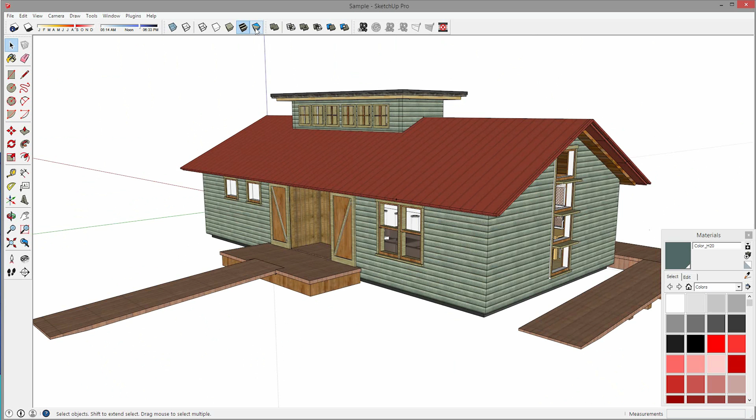Today I am walking through the process from SketchUp into Unity 3D, which will then build out to virtual reality. This rollout on the left will let you go to any place in the video you'd like. This is just a fast-forwarded walkthrough of what I'm doing to get these SketchUp files clean and ready for virtual reality.

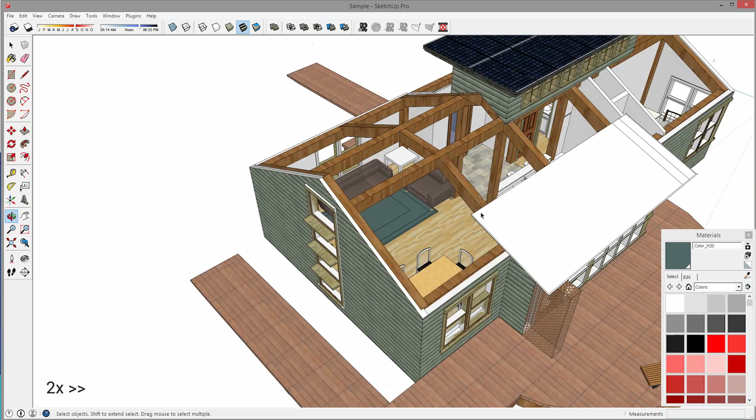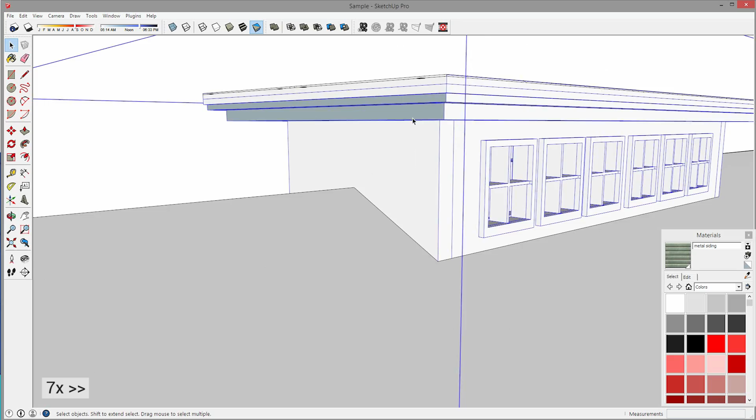So this is the SketchUp file. I start out by orienting all of the normals, and a lot of people don't know this is something SketchUp can do. I turned the edge style and face style to monochrome, which allows me to see which faces are actually flipped. When you import this into another program, these faces will be invisible, so you'll be wondering where that geometry went.

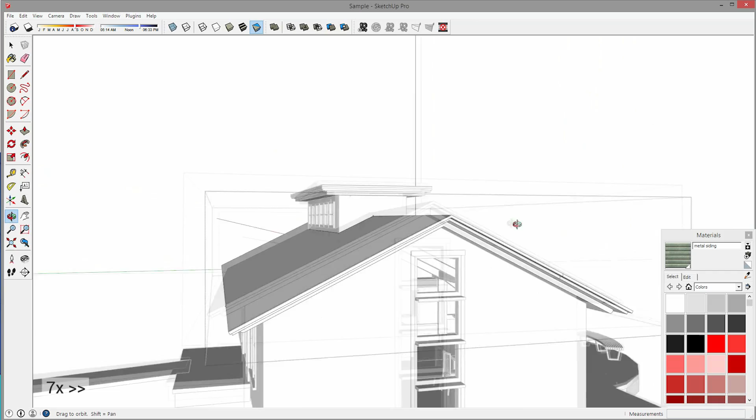So I turned on monochrome, and now I'm flying around the model figuring out which faces are inverted, and I'm flipping them while doing some general cleanup. This is an old file of a house I worked on about 6 years ago when I was learning SketchUp. I picked this because it's a particularly messy file, and it'll give you a good idea of the cleanup required for these SketchUp files.

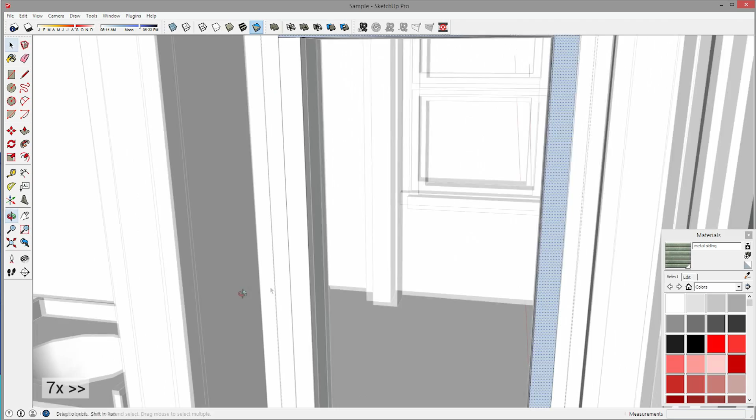I draw these section boxes and systematically go through and flip the normals of all these different items. To flip the normals, I'm just selecting the faces and right-clicking to do a reverse face, and once it shows white within monochrome, you know you've done it successfully.

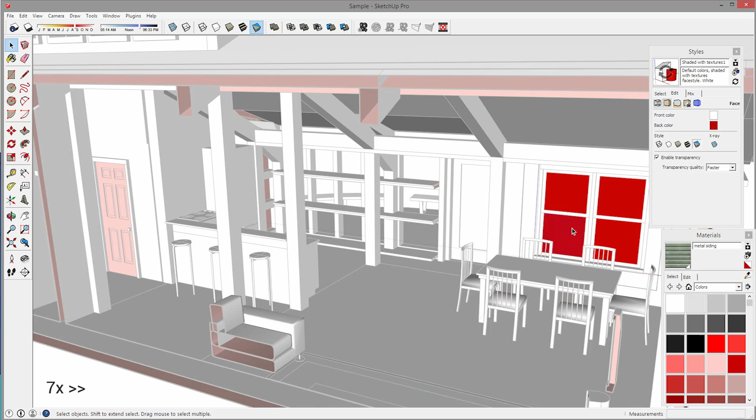What I just did was turn my face style to show all the back faces red, which is an easier way to see what's inverted and what's properly oriented. I highly recommend using the section boxes—it makes it quite easy to see what's going on.

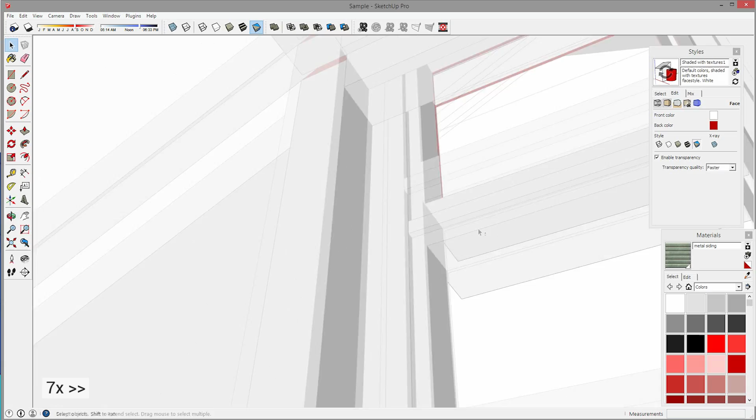All right, next I'm texturing these faces again. When you reverse faces, often the textures won't come through, so I'm just taking the paint bucket and retexturing all of these items.

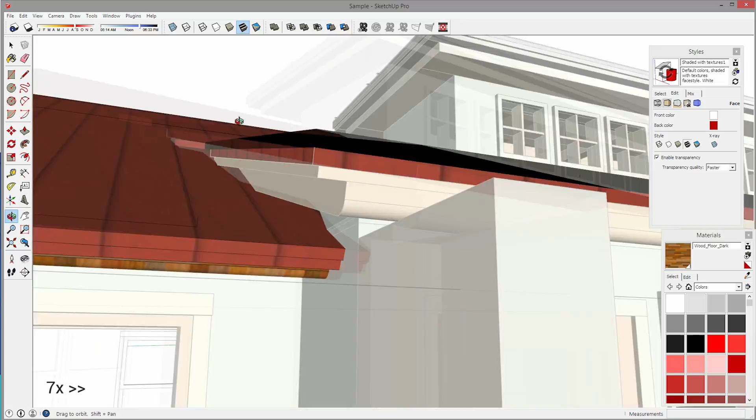I like to texture in SketchUp first because it'll translate into 3ds Max, and you'll be able to sort and select and organize by those materials. I do recommend keeping the materiality of your SketchUp model fairly organized, so you'll be able to use that organization later.

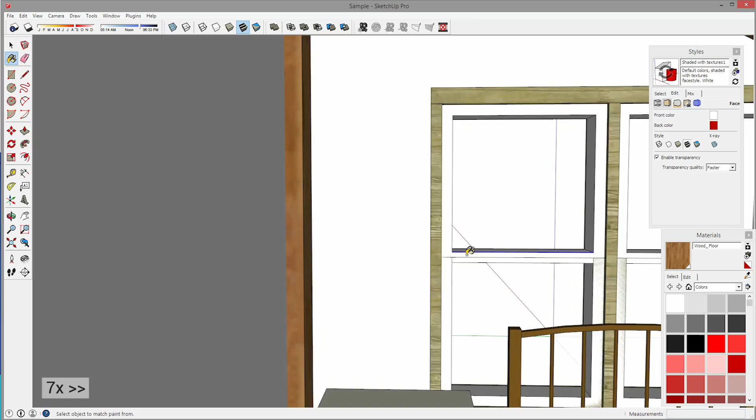I also wouldn't worry about total photorealism with these textures within SketchUp, because once we're in 3ds Max, I usually switch these out for higher resolution textures anyway.

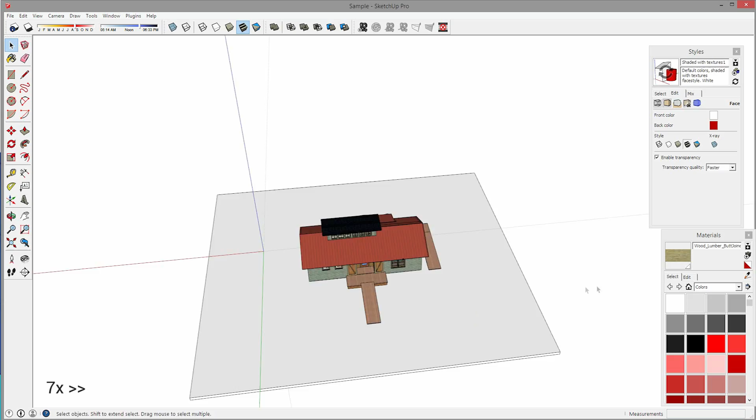I just made a ground plane, which is easier for walkthroughs once you're in virtual reality. It's nice not to fall off the map, and I recommend a general ground plane if you don't have that on your model already.

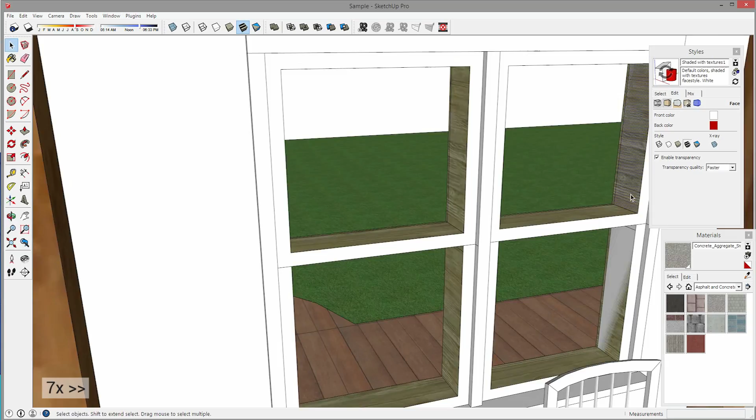You can see what I'm doing now is flying around looking for any sort of Z-fighting. That's where two faces overlap each other, and in SketchUp you get this flashing—you'll actually get that in Unity as well. It's very disorienting once you're in virtual reality to see this flashing.

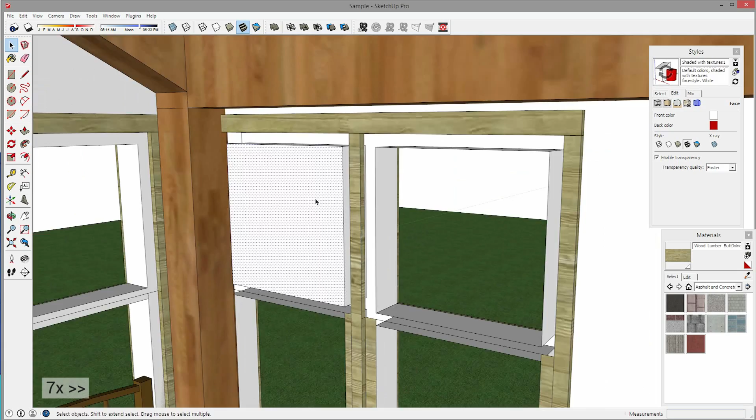Generally that's just from messy modeling, which in this file is a lot of the windows. So I'm going through and deleting the faces that are overlapping, then making one dominant. It was pretty tricky on some of this because I didn't do groups properly when I was learning, and a lot of the mesh is just overlapping on the same layer—it's generally a nightmare.

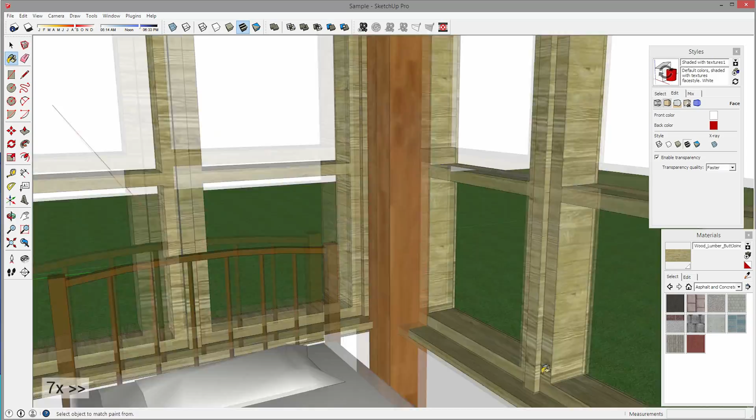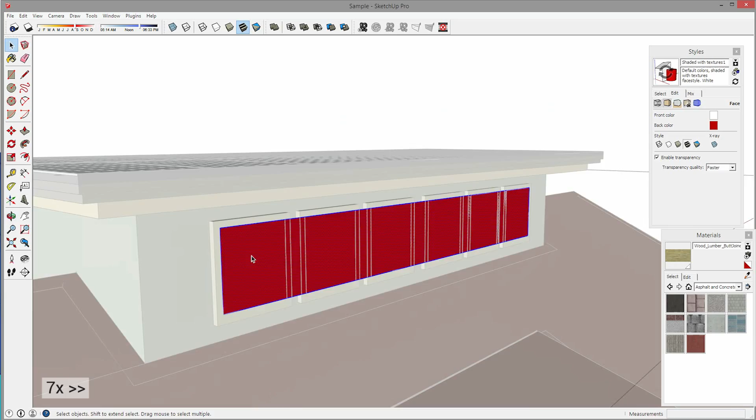Now I'm building a specific group just for all the glass. For occlusion culling and for general materials, I like to have all my glass on one layer or one object, especially going into Unity. So I'm creating all these glass planes individually under one group and giving them all the same material—it'll be easier later on to sort.

Honestly, if you're working with a big file, I wouldn't worry about this step, but this was a small house, so I could do this relatively quickly.

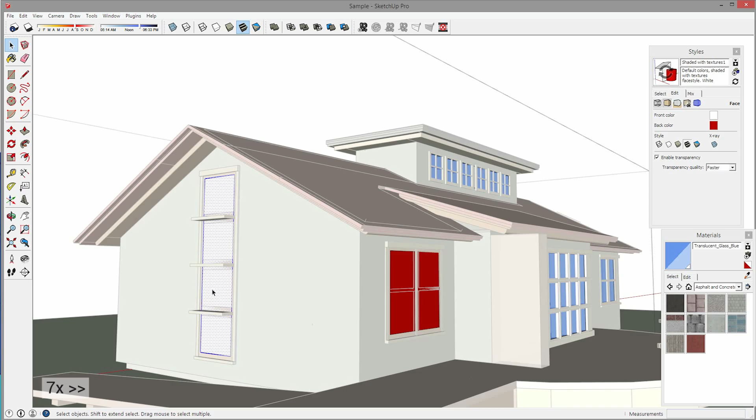I'm also making these rectangles three-dimensional, giving them a little bit of depth, which allows me to have true double-sided faces within Unity, so you can see the glass from both sides.

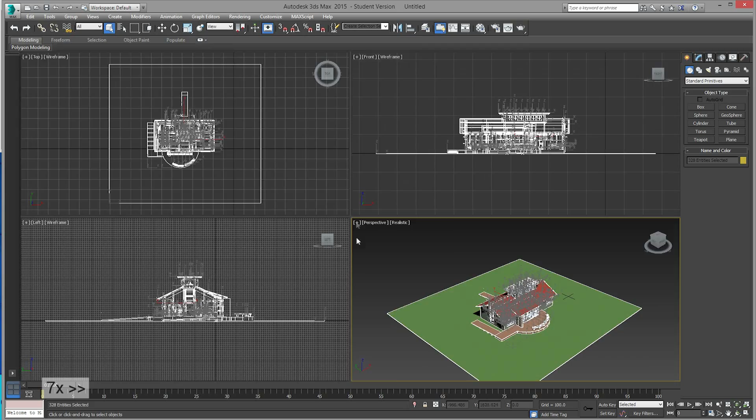I'm purging my file now, which I highly recommend doing—that will really limit file size when you export. Then I just back-saved into SketchUp 8, which allows you to import it into 3ds Max natively. If you have SketchUp 2013 or 2014 as the file, you'll get an error when you try to import into 3ds Max. So you want to back-save to 8 and then do the native import into 3ds Max.

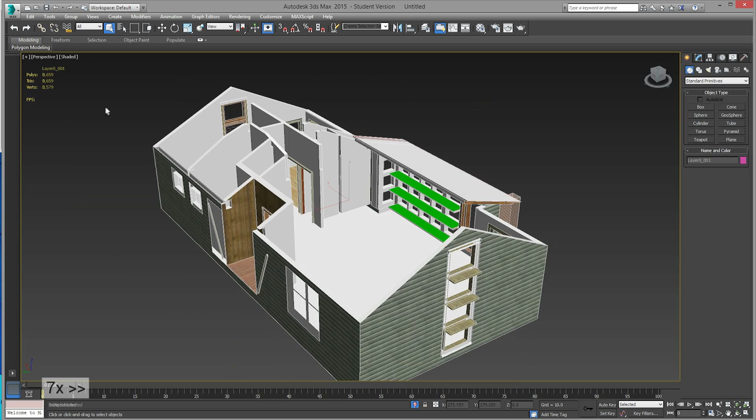I'm just checking the integrity of this file and making sure everything came through. You can see that I also turned on polygon count to see how heavy the file is.

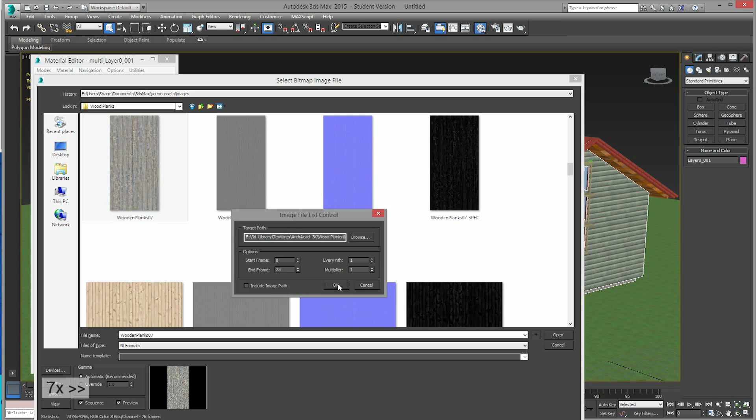Now is a very laborious process of going through and doing texturing within Max. This really comes down to how photorealistic you want your file to be for the VR walkthrough. But I have some huge library from Andrew Price of really nice, full high-res textures. In Max, I tend to go through most of the primary elements of the building and replace a lot of the SketchUp textures with these very realistic, high-resolution textures.

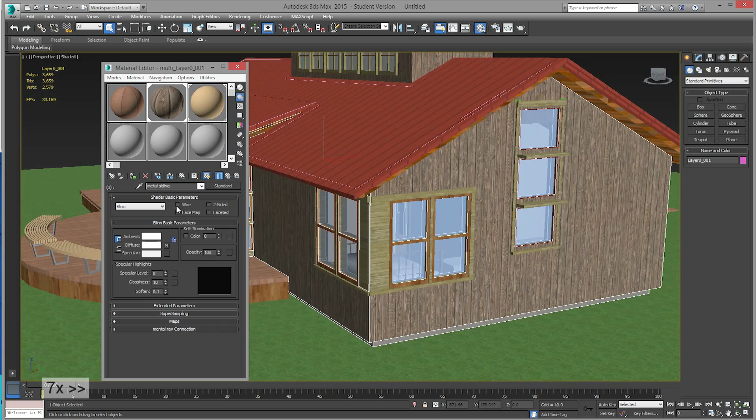What's nice about this package I got from Andrew Price is they come with normal maps and specular maps. You can see as I'm sorting through, I have a whole bunch of options with a lot of great maps. That was through the Architecture Academy, and I highly recommend checking out that entire suite.

This can really be as detailed or as long as you want. In general, I like the 3K textures because I can have them as high resolution as I want depending on the hardware for the final walkthrough.

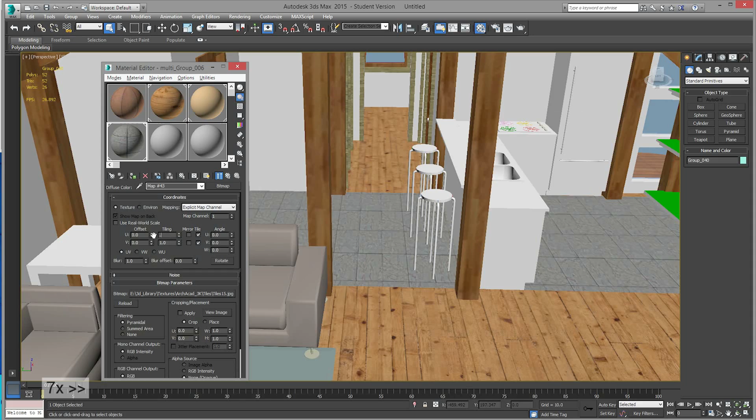I use Max instead of SketchUp because of its UV mapping, and when I want to get really detailed with any specific element, I can go in and actually tweak the UV maps and get them just the way I want before exporting. As I'm doing right here with the tiling, I want the seams to line up with the wood floor edges, so I do a bit of tweaking here to get those to orient nicely.

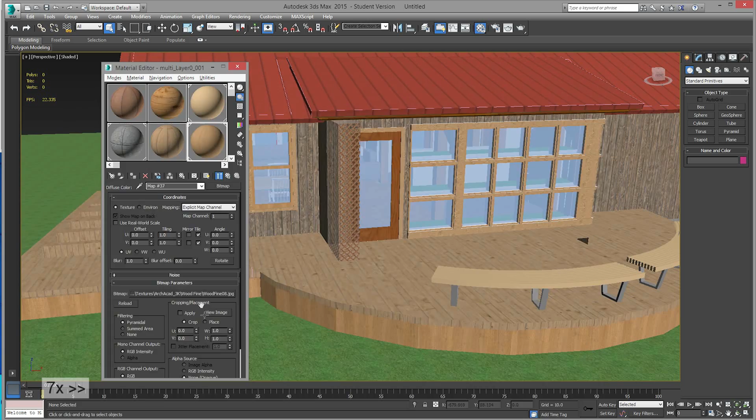Another note is SketchUp imports all of these materials as standard materials. If you're importing from another program like Revit, you might have Autodesk materials, and you're going to need to download a plugin or do it manually to get standard materials. That was my computer crashing and me booting up again.

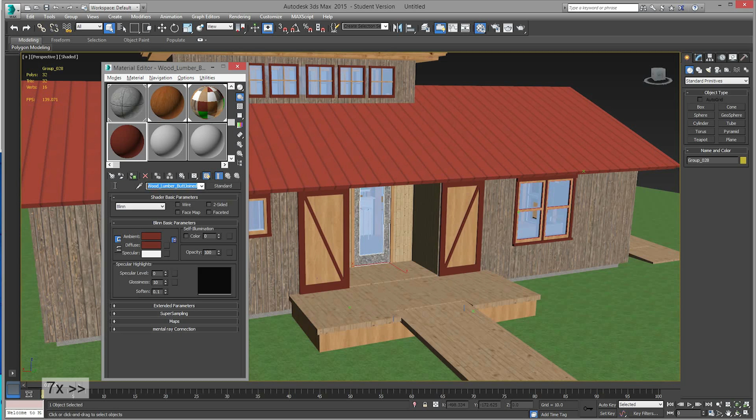What I'm about to do with some of these textures is, I didn't have all of the textures in-house on my machine, so I use CG Textures a lot to grab any other textures I might need. In a second here, you'll see me go there.

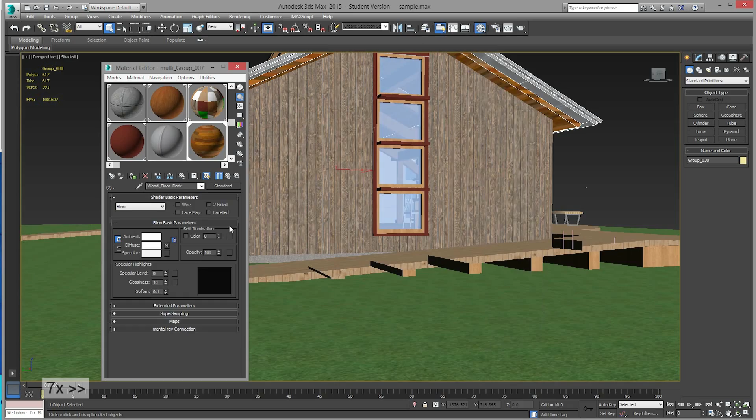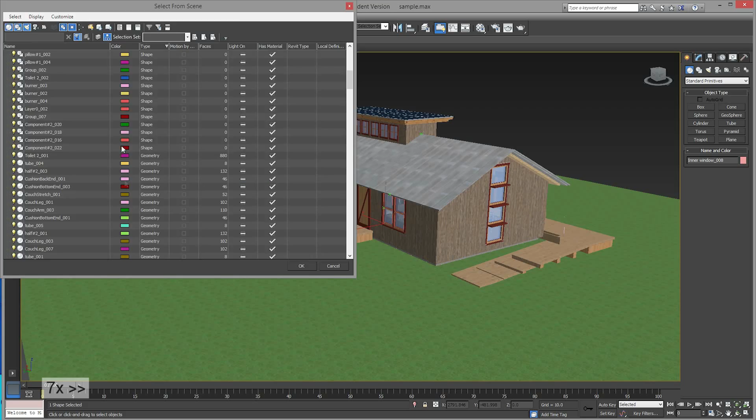Another reason I like to use Max is it'll get rid of any stray lines. You can see here I'm selecting just the shapes in the entire file and deleting them, and then that will get rid of any stray edges or points that aren't attached to faces, which just cleans it up a little bit better.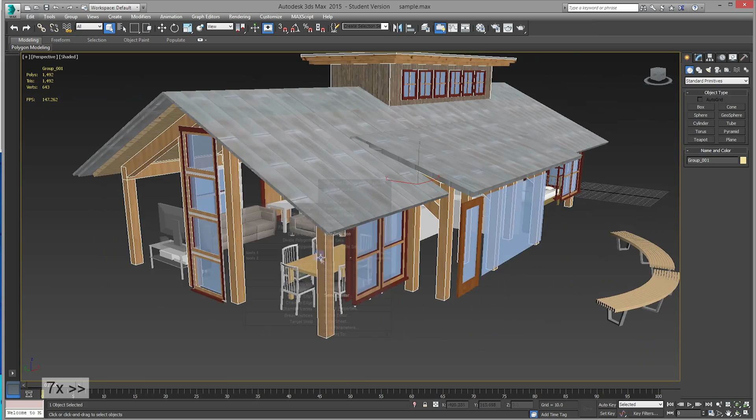Now what I'm doing is creating selection sets, and this is the best way to export your files. I recommend selecting various elements of the geometry by their properties, like walls, floors, windows, creating selection sets, and then exporting them as FBXs.

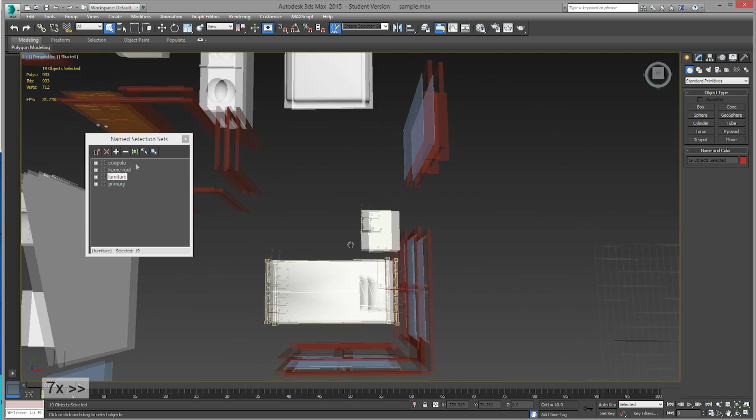If anyone's interested, I can upload my FBX settings, but really the only thing to note is that you want to export selected based on your selection sets, and then literally just hide them when you're done so that you keep your file organized. I also recommend embedding your textures and all of your media so that the FBX file is self-contained and has the textures inside of it that you need.

You can also see that as I go through this, I'm finding a couple of little things that I forgot and decide to tackle while I'm exporting this file. The reason I like using selection sets is that if you ever need to make an edit or there's something off, you can just toggle on that one selection set and edit whatever you need to in it.

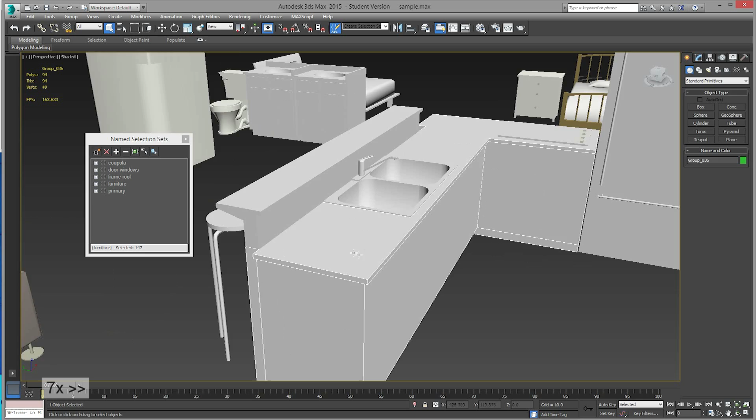Like I'm doing right here, I'm adding a counter material to this counter, and then you can re-export it, and your file will be the same when you bring it into Unity. So it's a nice way, if you have an edit, to just do that within the selection set, and then you get the exact same export next time you export.

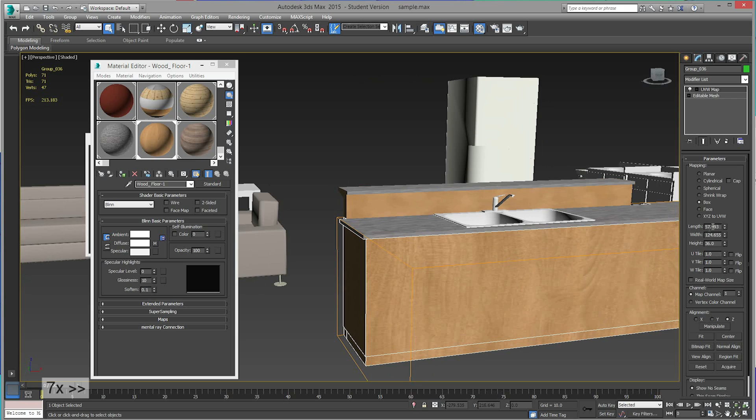Now that everything is exported, I noticed that these solar panels were rather heavy. There was way too much geometry attached to them. I think there was like 8,000 polys just for these simple planes. So I'm going through now and doing a bit of mesh compression.

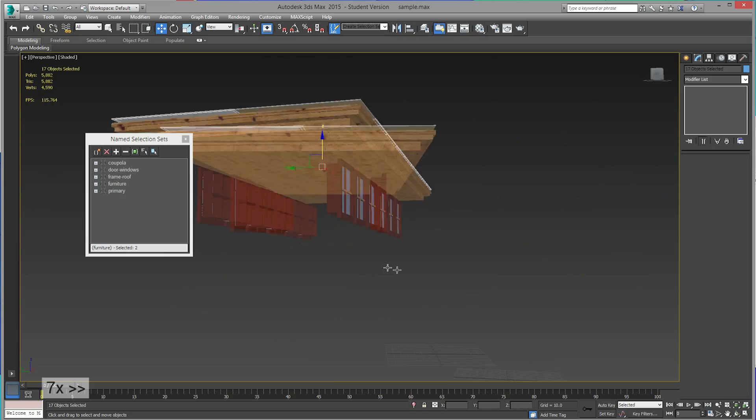You can see that not all of these are instances of each other, so I'm creating an array so that they will all become instances of that same component. And then I'm going to go in and compress that component.

I'm going to run a Pro Optimizer on it, which will just cut the mesh in half, in a sense, and then just run the UV textures on top of it so that you get a much lighter file. It doesn't look great, but at the same time, you're never going to see this in a VR walkthrough, so I managed to cut the polygon count in half running that optimization.

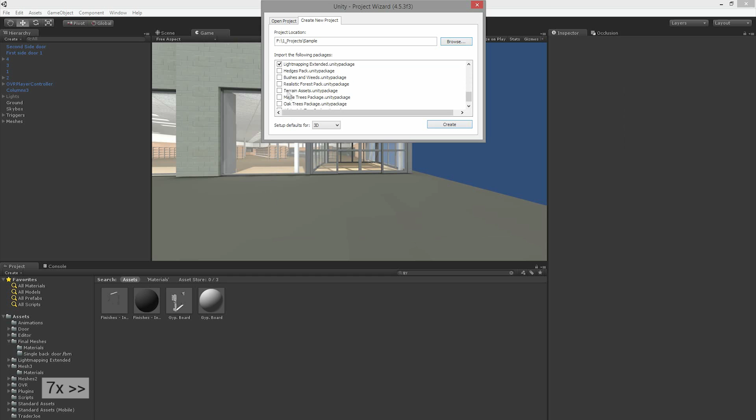And now to Unity. So I'm creating this file. I'm going to import those FBXs into a mesh folder and drag them all into the scene, into the project hierarchy, to put them all at their origin so they all line up.

So the nice part about doing these smaller components is they generally load faster. You want to set the scale factor to 0.0254 and also generate light map UVs. And then it'll be true to scale and ready to go.

I'm tweaking a couple of these textures because they came in a little transparent, just set them to diffuse. I'm adding lighting. Directional lighting plays a huge role in architectural visualization, so I recommend getting that position right. You'll see I tinker with that a lot.

And then on the north side, it's a little dark, so I'm adding a small little light to cheat. And I'm making all the glass transparent, so when light baking happens, the light will bounce accurately. And then adjusting the light a little more so it's a nice condition inside.

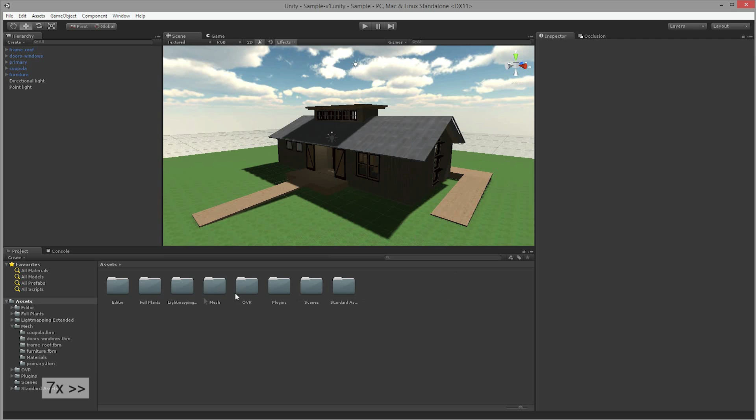Loading in my Oculus drivers, which right now is 0.4.1, adding my player controller. And as you can see, I tested it out, and it would be good to go right now. There's still a lot of tweaks to be done, but honestly, at this point, you could build it out and have a somewhat workable VR file.

Now I'm sprucing up the textures a bit. Because I have these nice textures from Andrew Price, I'm able to add these normal maps and get some nice bump textures into this file.

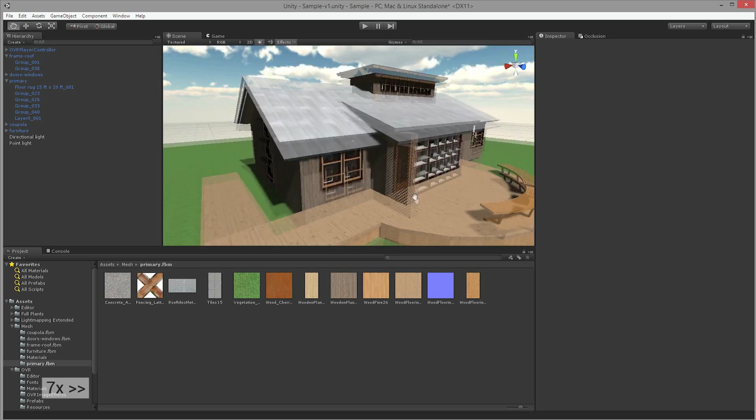Wood in general is also specular, so after you add the bump map, I would also add some shine to it so you get a more realistic texture. Also, you want to make your texture size bigger. Because I'm using relatively large JPEGs for my textures, I make the max size of these much larger.

And again, tiles are going to be a little shiny. Adding those bump maps, make sure you set that bump map to be a normal texture. Otherwise, you're not going to get a good result.

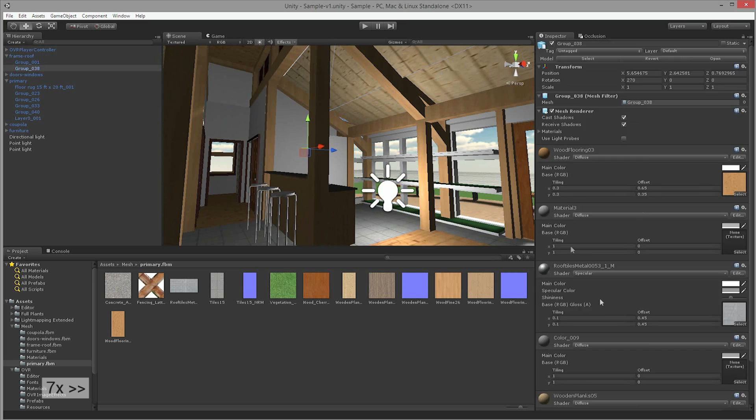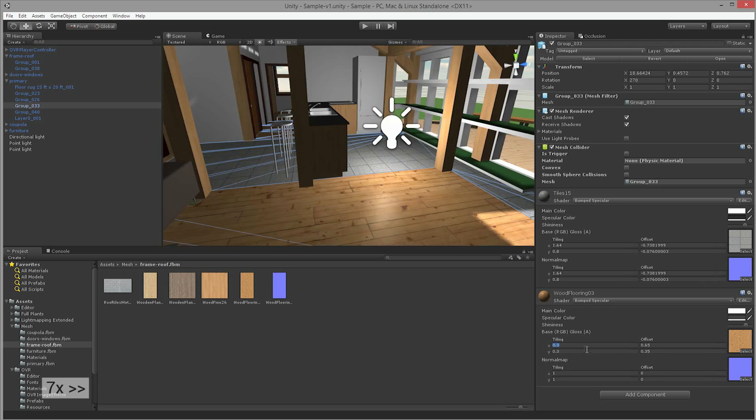With VR, you want to have your anti-aliasing pumped all the way up. This is going to be incredibly computationally expensive, but the higher the anti-aliasing, the better quality walkthrough you're going to have. So you can see I bumped that up and made my textures max resolution, and generally put all the settings at max. And if your computer can handle it, I recommend doing that as much as possible, because VR is really going to be only the best if you can do those settings.

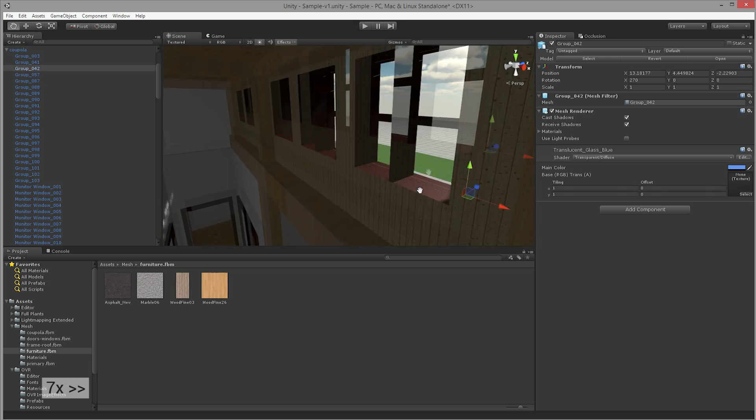I'm also adding a couple sort of cheap lights inside to simulate more daylight coming through. Even with good light bouncing, it's still pretty dark on interiors, so a couple point lights will go a long way.

And this was my failed attempt at starting a greenhouse. I realized for this demo I wouldn't take the time to do vegetation.

And then you're going to want to make light map statics for all of these objects, and make occluder and occludee statics for occlusion culling, and then do light baking. You can see I can post these settings later. These are pretty standard settings.

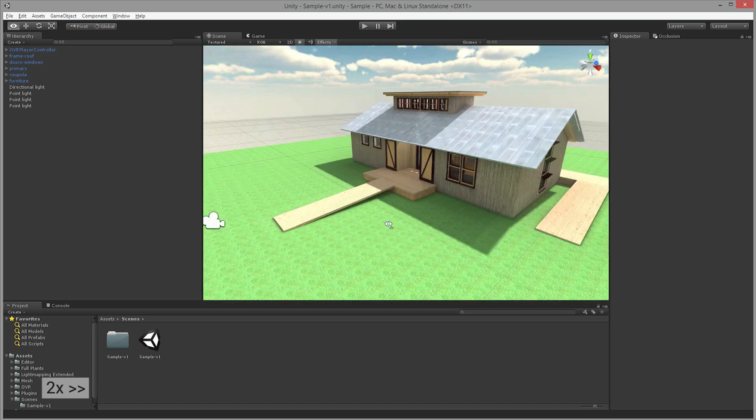Lightmapping Extended is great. You get much more fine control. But honestly, just make sure you got a lot of bounces happening and some boosts. And after a couple hours, this is what the file looks like.

So you can hide your lights because that's all baked in. And then you're pretty much set to go.

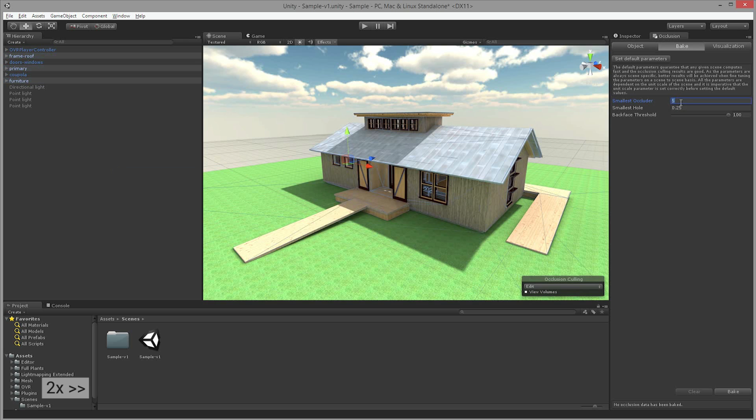I highly recommend putting on occlusion culling. That will sort of hide the meshes that aren't visible by the camera when they're not in view. I would make the smallest occluder smaller than the default, especially for these smaller scenes. And you'll see here I'm testing to make sure it works by rotating the camera a bit. This makes a huge difference in the overall performance of these demos.

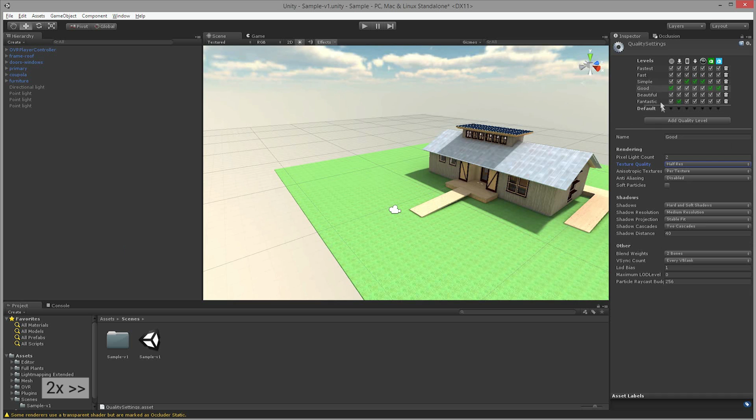And that's the process. From there you can make sure your quality settings are maxed out. Again, like I was saying, that really matters for comfort within VR, as well as at these lower resolutions, giving the best experience. Also making sure that they run at 75 frames per second, but that will be another video. And then building it for your desired platform.

Holding down Control while clicking on the executable will bring up your settings. I'm just setting this so the screen recorder can see it.

And that is the entire workflow from start to finish. I cut a bunch of parts, but it took me about 5 hours. And it wouldn't be a complete workflow without this crash right at the end of the video. But thank you guys for watching. I hope you enjoyed it.